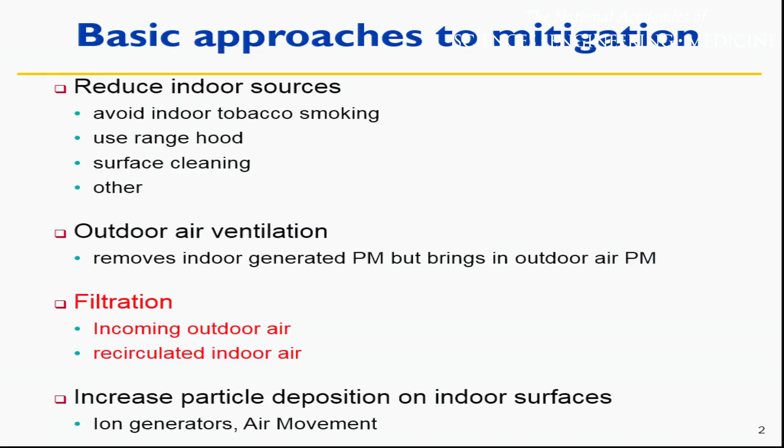We just had this discussion about outdoor air ventilation. It can remove the indoor generated particles. It brings in outdoor particles. My view is it's not a very good particle mitigation technique, and filtration is far better because it doesn't have that disadvantage. And there's filtration, which I'll talk about, and then there's other techniques to enhance the particle deposition on indoor surfaces, like using ion generators and increasing air movement. I'm not going to talk about those, but there may be some potential there. With ion generators, I'm a little worried about how they also affect the particle deposition in the respiratory tract.

And then within filtration, there's a host of technologies. I'm not sure this is my final version here, but it'll work. Host of technologies, and I'm going to focus on the sort of dominant technology out there today, which is to use fibrous filters or stretched membrane type filter media. But there's electrostatic techniques, combination techniques, and I think Brad will talk about using the building envelope as a filter, or a tight building envelope as a filter. So I think all of these have potential, but given time constraints, I'm going to focus on the first.

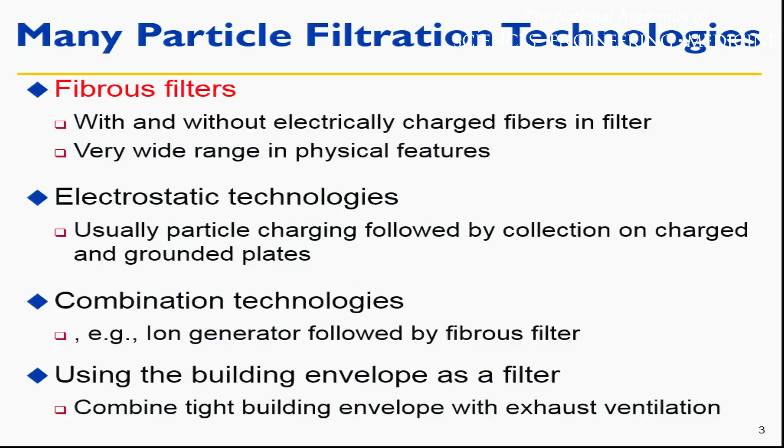Performance factors for filters. There's really a host of them. I'm not going to go through all these, but there's a set of factors that affect the particle removal, a set of factors that affect the energy and the cost of filtration, and then there's some other factors like reliability and pollutant production from the filters. And a few of these, I think, people don't pay enough attention to, so I want to highlight them. One is the duration of the airflow. Brent, I think, talked about this, and that can be very low in a HVAC system in a home.

Another is, where is the filter located? Is it filtering the incoming outside air, recirculated air, a combination of two? Where is it relative to the sources of pollutants? Where is it relative to the people? Important factor, almost never focused on. And how much does it cost? Because I think that's a big factor that drives whether people are going to use filtration.

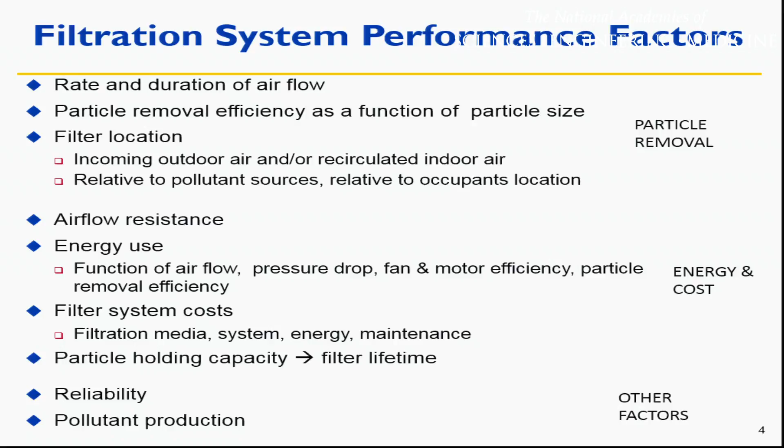The leftmost bar is sort of the baseline school where we've got a low efficiency filter, but at least we've got the HVAC running continuously. And these are the removal effectiveness values you can see here. The next bar over is where they've added a high efficiency standalone filter in the space. And I estimated that it was processing about 2 to 2.5 indoor volumes per hour. And you can see the removal effectiveness jumps up quite a bit, and that's the case for all the different categories of particles here.

And then the rightmost bar in each group is where you replace that low efficiency filter in the HVAC system with a MERV 16 filter, a much more efficient product. And again, you see much bigger improvements in removal effectiveness. So filtration here can be quite effective.

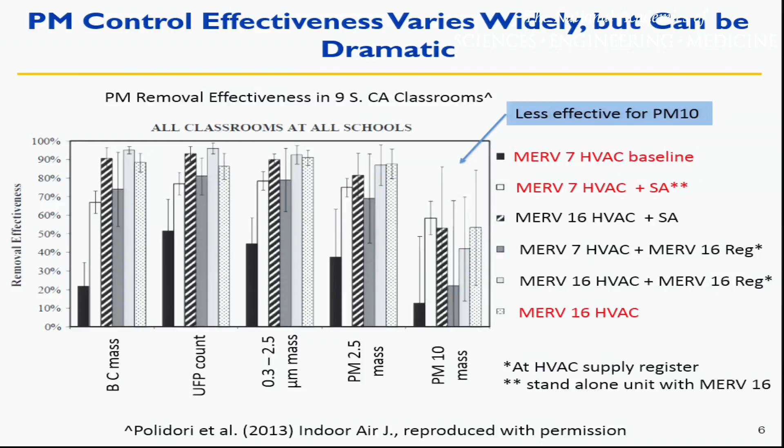Baseline filtration is not that effective. And it's effective for a broad range of particle types. Also, filtration can be quite effective for

nanoparticles. This is a controlled laboratory study, and this is the particle penetration, or 1 minus the efficiency, in the vertical axis. And each of these curves here is a different filter type. And first of all, just look at the axis values. The penetration factors range from about 20% down to a fraction of a percent. So for these nanoparticles, the filters are removing them quite effectively.

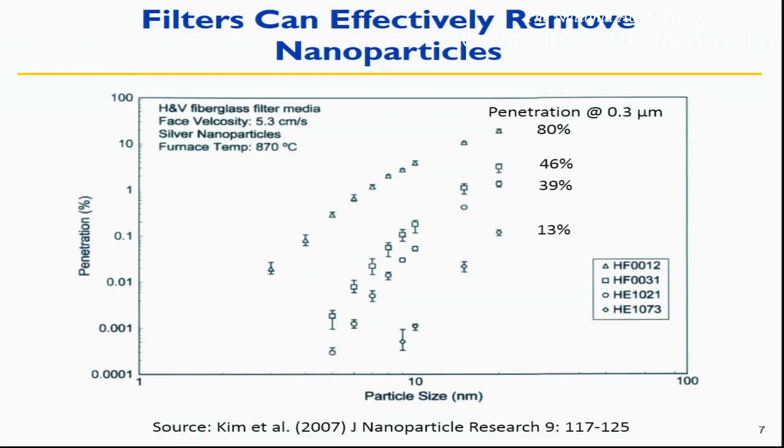And that's even for filters that have quite a substantial penetration at 0.3 microns. So filters can work well for these nanoparticles. It doesn't mean your run-of-the-mill see-through furnace filter works well for nanoparticles, but filtration can work for nanoparticles.

However, what do we require today in standards? Very low efficiency filters, for example, in the ASHRAE standards, about a MERV 6, unless we have high outdoor PM levels. And here's an example curve of the particle removal efficiency versus size for a MERV 6 filter.

For most of the size range, it's below 20%. And for a lot of these particles, it's below 10%. So the filters that we're commonly using have a very low efficiency for particles in sort of the most interesting size range.

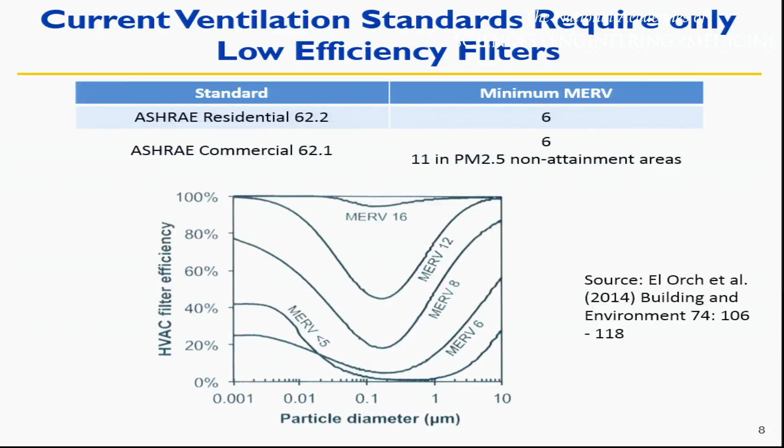Also, what we do today in homes is we put those low efficiency filters in our HVAC system that runs intermittently. And you can do this very simple calculation to show that you're not getting much particle removal for PM 2.5 here. If you look, more than half the homes have a MERV 6 or lower filter, given the small amount of data we have.

Efficiency is low. Here's a typical flow rate per unit volume and a duty cycle. And the total removal rate on a volume normalized basis is less than 0.1 per hour. So those filters are not really bringing us a lot of benefit, but that's what we do today.

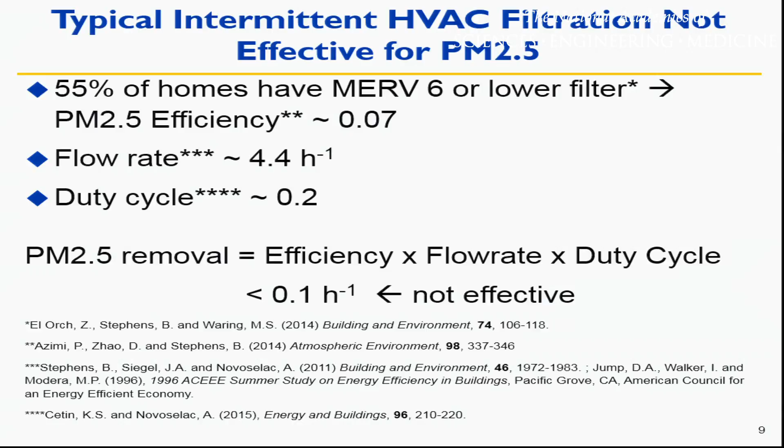Charged fiber filters, Jeff, you touched on this. There's a lot of filters, a big part of the market, that have embedded charged fibers, and that can increase at least the initial removal efficiency. But the data suggests that for some particle types, you see these rapid drops in efficiency.

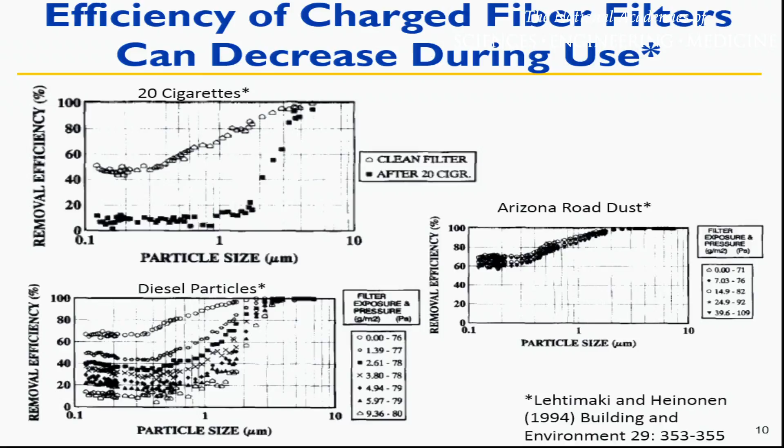However, for something like Arizona road dust here, we don't see the efficiency drop. And I haven't looked real hard, but I don't think we really fully understand the physics that's behind this process.

Another trend in the field is to use nanofiber media in filters. And as the filtration industry uses the term, a nanofiber is less than 0.5 microns in diameter, whereas a typical filter is a micron or so, or tens of microns or so, in the fiber diameter. And usually the nanofiber filters are composites where they may have layers of micron-sized fibers and layers of nano-sized fibers

in that filter. But this is a trend, and there's experimental data showing they can be very effective for the small particles, but there's a little bit of data now suggesting also that you can get a higher ratio of particle removal efficiency to pressure drop with these nanofiber filters. So I think they offer some potential that way. I think this is not the main way to improve filter performance. There's other ways, but this can help us.

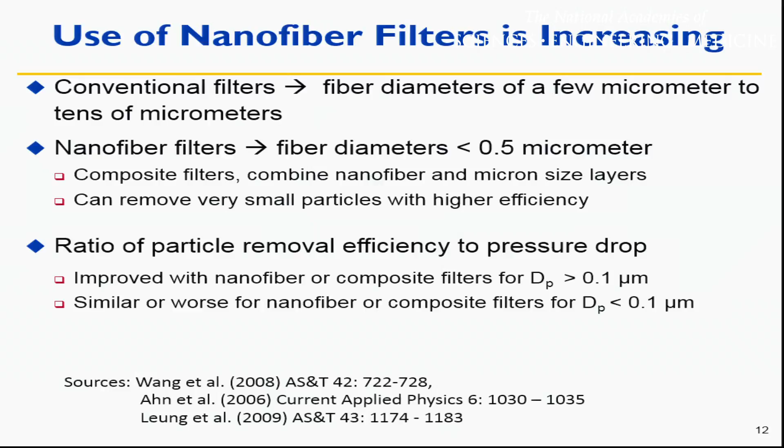Another point I want to make is that the energy used to remove particles by filtration varies dramatically depending on the system one is using. So here I'm comparing an HVAC system in a home with a low efficiency filter, and we've put in some typical numbers, and we've estimated that the electricity to run the fans costs about $17 for every gram of PM removed. That's if you're running this thing continuously to get your particles removed.

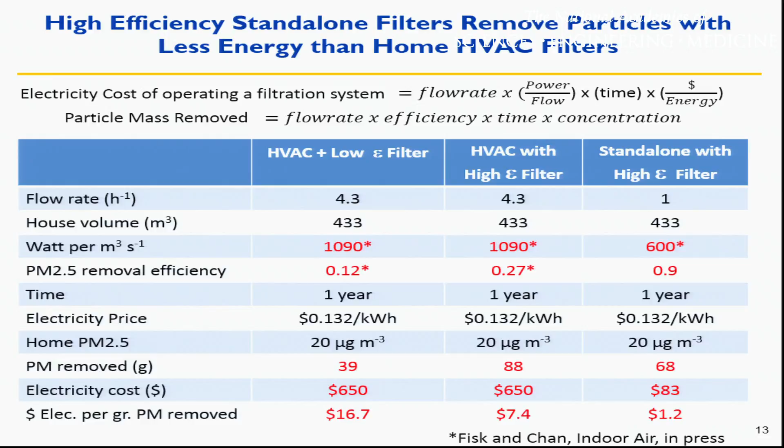So you run this thing continuously, but you put in a higher efficiency filter, you bring that down to about $7 per gram of PM removed. But if you have a high efficiency standalone unit, two things happen. The efficiency of moving air is better, and the efficiency of particle removal is better because they use better filters. So for every unit of air moved, you get more particles removed. That brings this down to about $1 per gram of PM removed. So there's a dramatic difference in the energy cost depending on how you do the filtration.

One of the reasons people don't want to use better filters is they think that they're going to increase the energy costs and the airflow resistance, and it's prohibitive. But the data really doesn't bear that out. You can use deeper filters and more pleating, and you can keep the airflow resistance down. What happens is that the filter cost itself, the media cost, does increase. But I'm going to argue that that increase isn't so high.

First of all, what happens in a residential situation, this is by my colleague Ian Walker, who said that the fan energy in a home changes by about 1% or less if you use high efficiency MERV 10 to 13 versus MERV 6 filters. So not a very big effect there.

And here's a nice life cycle cost comparison of filters with different ratings, accounting for all the factors. And I've converted those to a per person cost. And so we can see the range is $7 to $11 for the very low efficiency filter, $19 to $35. So we're talking about a fraction of a dollar to maybe $3 per person per month to get a lot better filtration in our commercial buildings. And the incremental cost of getting better filtration is about half of that amount. So it's not a very expensive process, even when you account for all the costs.

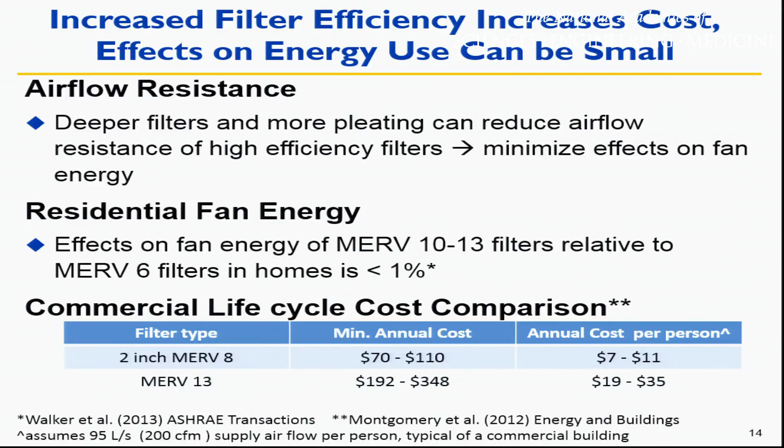Okay, a couple of years ago, I had published a review of the literature on the health benefits of filtration. And I want to give you two main conclusions. The first has to do with using filters in homes to reduce allergy and asthma outcomes. And there's a lot of good quality studies today, controlled studies with placebo filtration versus real filtration in homes, looking at allergy and asthma outcomes with both self-reported and objective outcomes.

Does it work? The answer is, unfortunately, we don't see a lot of benefit. We do see some evidence of benefit, predominantly just in the homes that would have pretty strong allergen sources. And even in those situations, we see moderate reductions in the health outcomes, and a lot of the health outcomes are not improved. So it's not the solution to these problems.

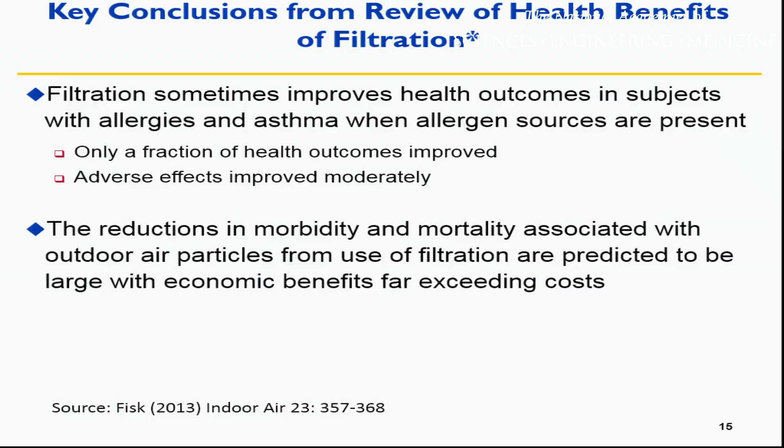What looks like its greatest potential based on the published literature is the reduction in the morbidity and mortality that we find associated with outdoor particles when we use better filtration to reduce the indoor concentrations. And several studies have looked at that. There are a lot of unknowns in terms of whether those risk factors that they're using for outside apply indoors. But to the extent that they do, this is quite effective, and the health benefits far exceed the cost of those interventions.

Skip that. I want to talk a little bit about some of the challenges. I'm not going to cover all these, but given that we have good technology and it's not that expensive to use, but it's not being used, I think one of our challenges is really doing a better job of quantifying, demonstrating, and communicating the benefits of filtration today. Something we can try to do better today. I'd like to see us try to encourage those involved in the standards process to up the minimum requirements.

I think one of the challenges is for allergens or locally resuspended particles. I suspect that filters don't work particularly well for allergies and asthma because the exposure mechanism may be substantially due to local resuspension of allergens, and filtration isn't very effective. So we need better ways to mitigate those exposures, or other ways to mitigate those exposures.

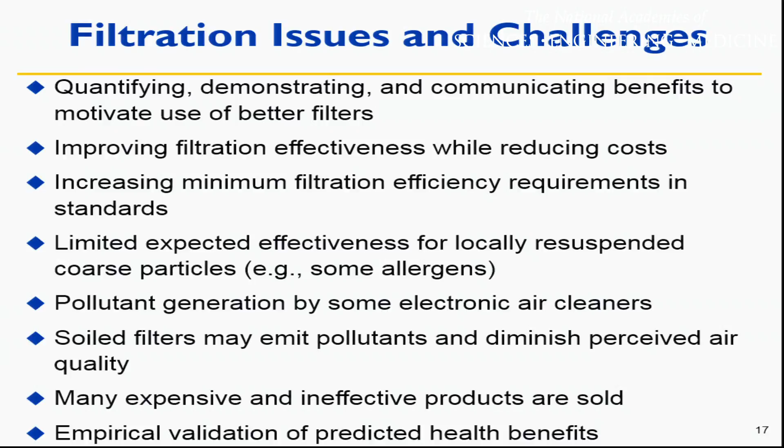We have many very expensive products people are spending hundreds of dollars for. They put them in their homes, and they're worthless products. And so we're not communicating well enough to people so they make good decisions. So I think that's an important need.

Two other points that aren't on here. There's a move toward natural ventilation in commercial buildings. There's a lot of reasons to go toward natural ventilation in commercial buildings, but that increases the exposures to outdoor particles. So are there ways that we can mitigate the adverse particle exposures and ozone exposures in those naturally ventilated buildings?

And the other issue I wanted to mention is we want to get a better understanding of the health risks of outdoor particles and indoor generated particles. And we can use filtration as a tool to differentially affect our exposures to outdoor source particles and indoor particles. And I think that could be a tool that we could use in future health studies to get a better handle on that question. I think that's it.

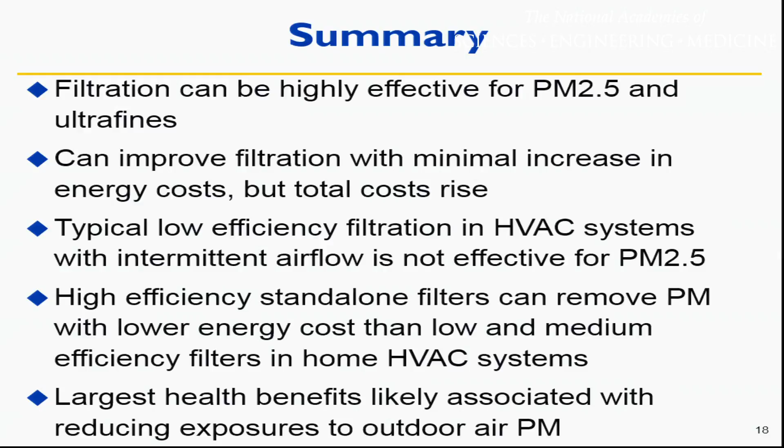So briefly, filtration can be very effective for PM2.5 and ultrafines. We can do a better job today with minimal increase in energy costs and moderate increase in total costs. But typical practice today is not very effective. These high efficiency standalone filters can remove PM using a lot less energy than home HVAC filters. And it looks like the largest health benefits, at least given what we know today, are probably associated with reducing exposures to outdoor PM, not related to the allergy and asthma problem.